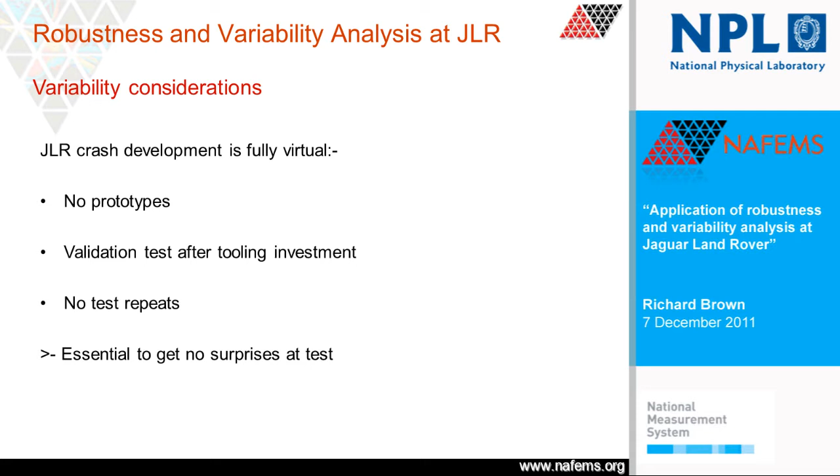These surprises lead to, and we all know these, late design modification, inefficient design. So if I base my design on certain assumptions, if my assumptions are wrong, I will have necessarily an inefficient design. I only do one test, my validation test. So it may be that if I do a second test, it might be a failure. My first test is a pass.

If I get that test done by a legislating body and they find there's a failure, I've got a really big issue, because that might be a recall of vehicles. This could be millions of pounds to the company. So it's all very costly, which is what it's about. It's about cost, as far as we're concerned.

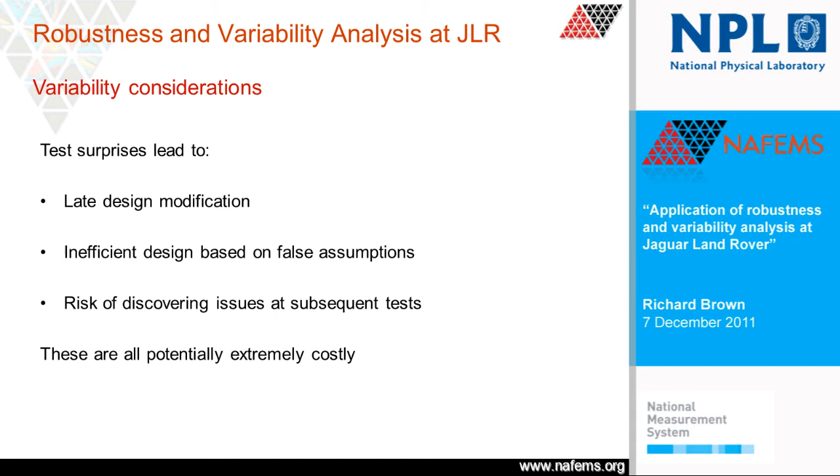Variability leads to these surprises because of all the things that we know. So test-to-test variation. You spoke about initial assumptions being different, being wrong because of the variability. And non-robust numerical models, which is where we're coming from with Clements' talk.

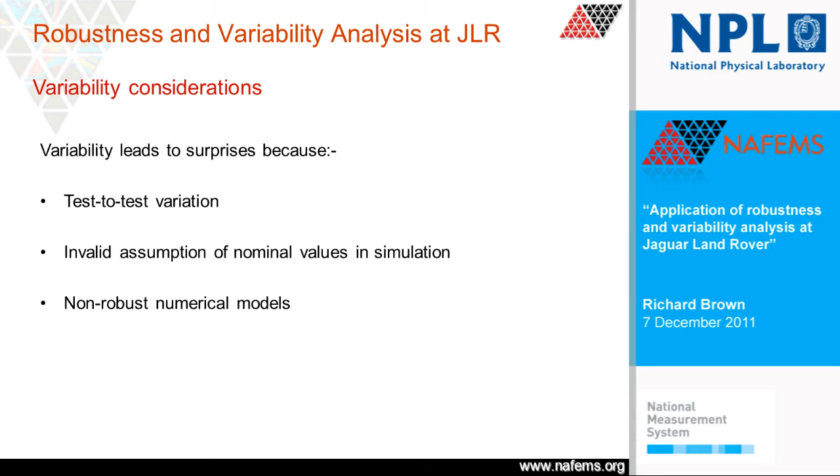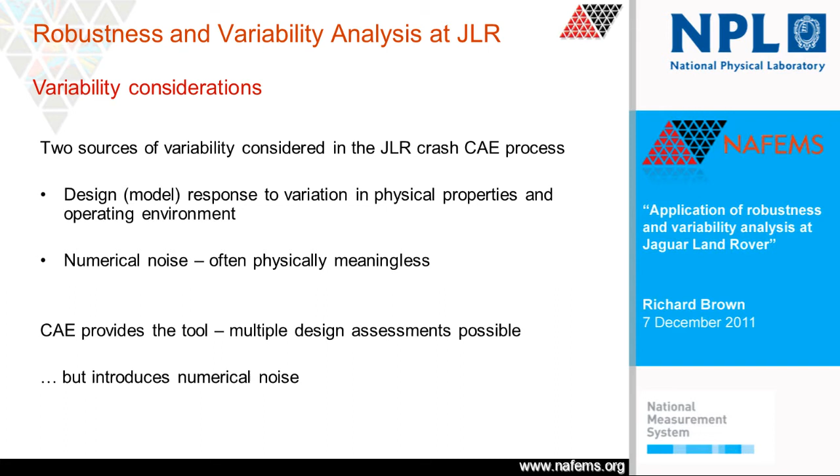So in my world, in Crash CAE, I've got to think about two things. First of all, the response of the design to the physical properties and environment variabilities, represented, of course, in my model. So I've only got my model to talk about the physical world. And also the numerical noise, which often has no physical meaning, it's purely a numerical effect. And the CAE is a very useful tool for all of these, but it brings its own problems.

This comes from, in crash terms, something like 5 million degrees of freedom, 100,000 or 80,000 time steps. There's just so much opportunity there for rounding errors and issues like that to build up. Each of these runs, though, is valid. As I say, I only changed the organisation of what went into the runs. They're all exactly nominally the same input. And the nominal, or the one that I started with, is not necessarily any sort of average here. It's simply one randomly chosen option from that population.

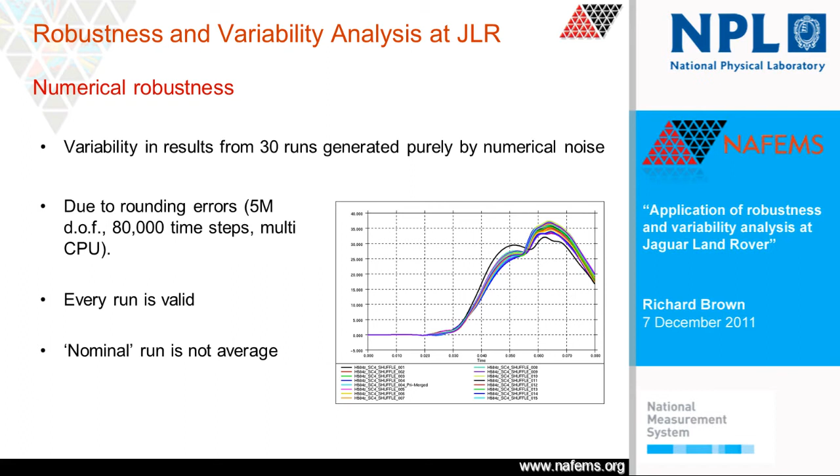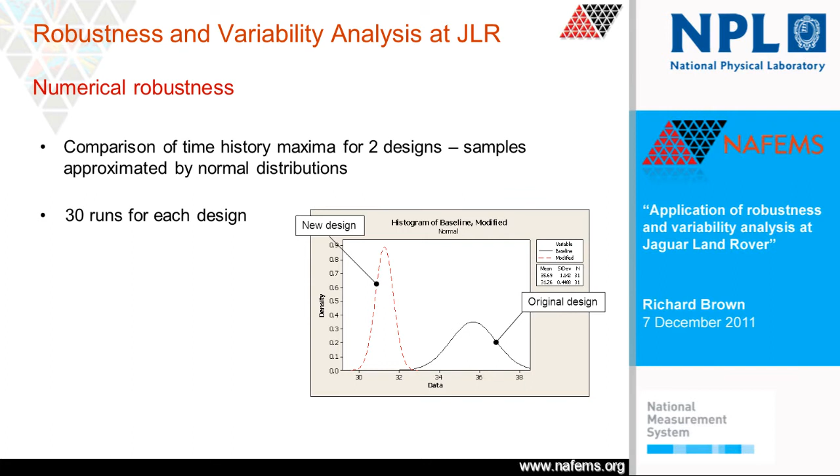We then did a change to the design, and this was the distribution that we got to that design. So the question is, how different are those two designs? 30 runs were done, so it represents 30 runs in each case. If I take the mean of those populations to be a measure of the difference between these two designs, then the difference, the change that I've effected, is 4.6.

The two runs that I originally did, so from the original 30 runs that I showed, I originally just had one run, and I did a back-to-back run with the new design. And that's where they came out. Coincidentally, if you like, arbitrarily, 1 point there, 1 point there. So I originally thought my design change was 3.8 rather than 4.6.

So you could say, well, I've actually done better than I thought I did. But potentially I've over-engineered the design. I've over-engineered it on the basis that my change was 3.8. Actually, I've got a bigger change. I've got 4.6.

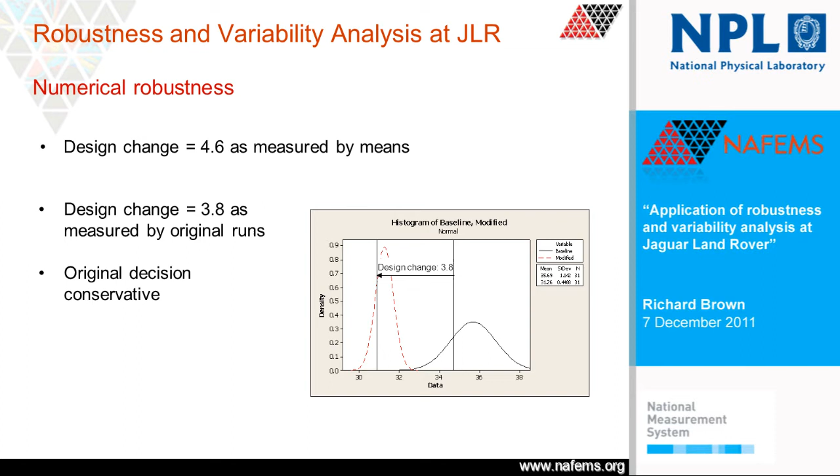If I was to say, well, what could have happened out of a back-to-back? I could quite easily have got a run here relating to this one, and a run here, if I'd chosen any two runs. So I could have quantified the benefits 2.8, or I could have quantified it as 6. So if I happen to get this run and this run in a simple back-to-back comparison, I could have got 6. So I could arbitrarily get anything between 2.8 and 6. I happened to get 3.8. The mean said it was 4.6. So it's chaos really as far as that's concerned.

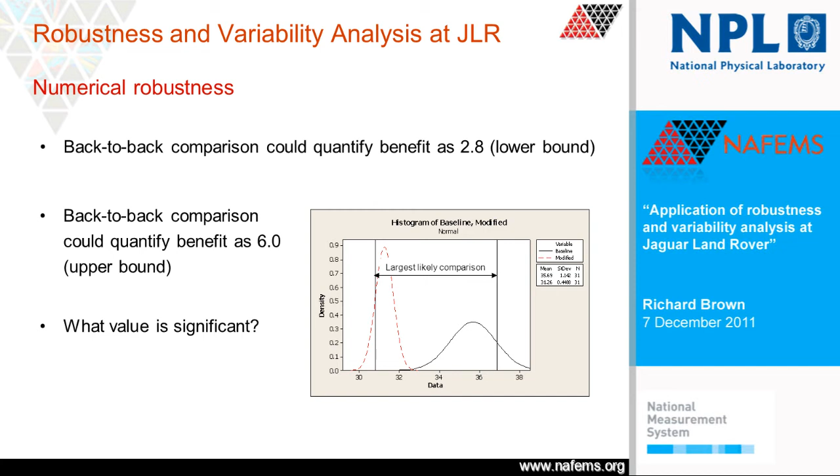So if you look at what is actually significant, there's this idea of model precision. So this original model here, within some limits, has got a model precision of 4.4. If I get a run, then do another run, if the difference between them is greater than 4.4, I can say there's a change in design. If it's less than 4.4, I can't. That's the level of precision of the model.

In this case, clearly I've got a model that's more precise. So I need to get a run that's outside of these limits to be able to call that run different to that population. Clearly in this case, for some reason, the new design is more precise than was the old one. And that perhaps just reflects the fact that the design is a better design.

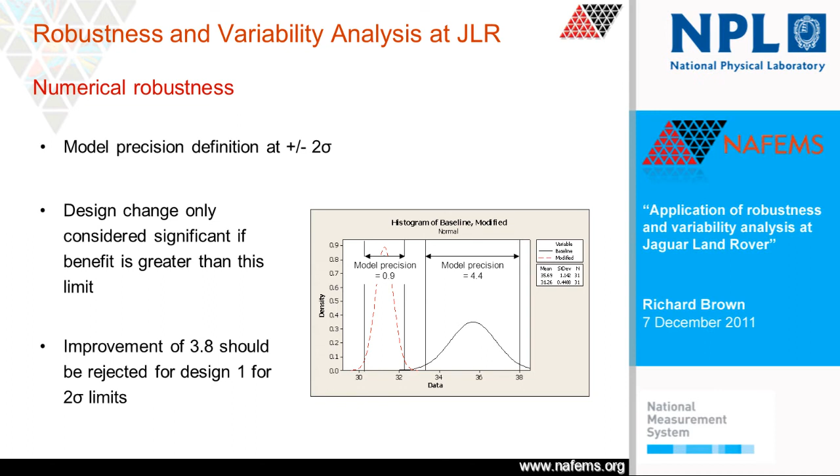So the upshot of that is that a back-to-back comparison is effectively invalid if you don't know anything more about it. The variation can be bigger than design change, and actually often is. We're often making decisions based on an assumed design change that's smaller than the variability I've got numerically. I can't do that sort of robustness study for everything. I haven't got the CPU, so I've got to be able to deal with that. And the way to do that is to understand the precision. Unless I understand the precision, I don't know the significance of any design change.

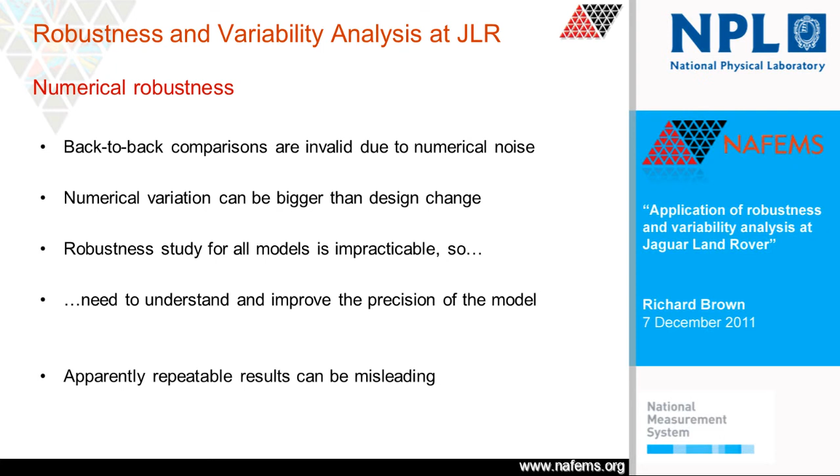And the other thing is apparently repeatable results. So some software programs, particularly in Crash, will say, I'll give you the same result every time I run. Now that is invalid because that's purely putting an artificial constraint on saying I'm always going to do it in the same order. Doesn't mean to say the variability is gone. It's just an artificial way of forcing one result.

So thinking about sources, and this is the link with Clement's work. We've recently started to employ some of the principles that we're talking about there. So where does the numerical noise come from? And it can be very difficult to trace. In the Crash world, we often only see it actually later on. So this is something like 120 milliseconds. It's very late on in the Crash event, and we notice these two differences.

So here's two design conditions. No, I beg your pardon. Two nominally identical runs. So I've done the same again. I've just run the model twice, and got these two differences. This contour represents the degree of variability. So as Clement showed before, what this says is we've got a lot of variability here, a lot here, not much variability here. So this red represents the difference between these two models. So what I'm trying to do is to see, well, where's that coming from in numerical terms?

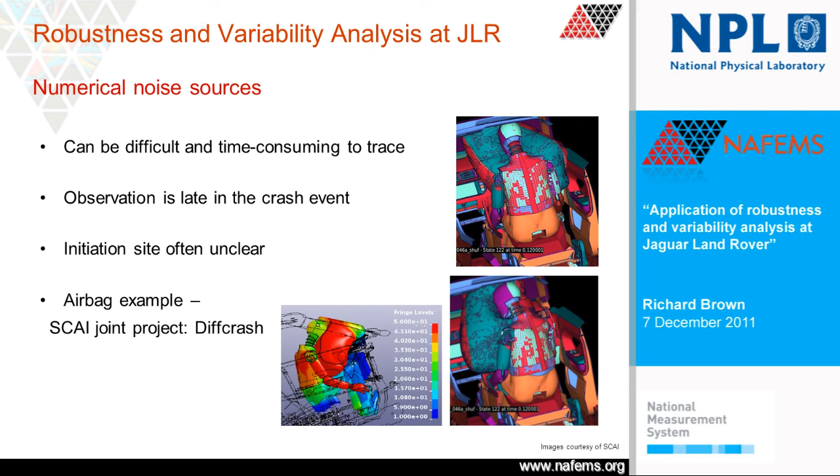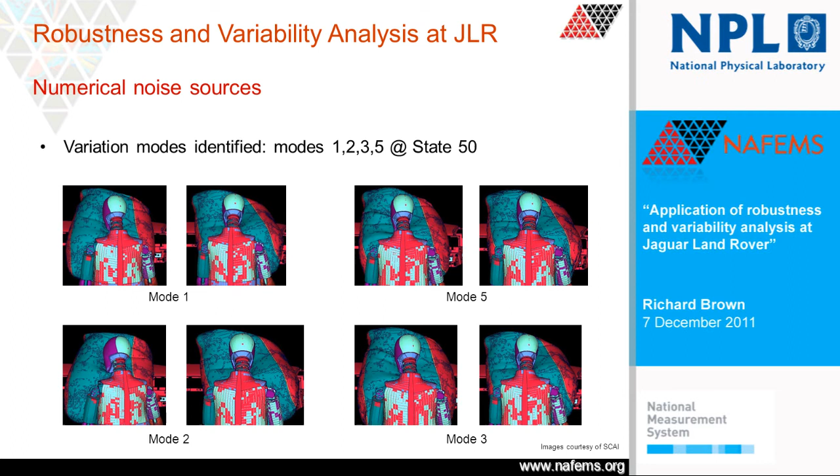And this was a joint project then that we did with SCAI, with Clement, using these principles. Splitting it down into the modes, as he explained, we identified 4 modes which were principally responsible for the variation. And you can see what they look like. So there's a mode doing this difference. There's a mode representing this difference, and this difference. And this again at state 50, which is probably 50 milliseconds or something. So the question is, where does that come from?

If we trace those modes back now to state 13, which is 13 or 15 milliseconds, again they're the same modes. So what is initiating, or what is the earlier effect of each of those modes, is these 1, 2, 3, 5 numbers. So they equate to the same modes. So in other words, mode 1 here ultimately leads to mode 1 afterwards.

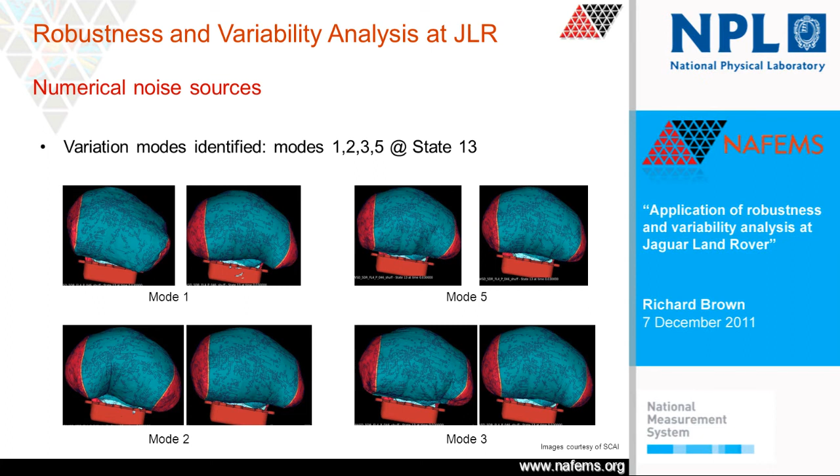And doing a bit more analysis showed that taking the first mode and looking at what is the real difference inside, these are two hoops inside an airbag. So they're hoops that represent bits of tethers, as we call them, inside the airbag. And in one case we had a contact issue here, and in the other case we had no contact issue. And bearing in mind these are nominally identical runs still, this is just a measure of the uncertainty, the numerical noise in the system.

So the solution to this was to make the model more robust, more certain, less variable, by modifying the contact definition there, so that this difference in contact here didn't happen. It was a robust contact definition.

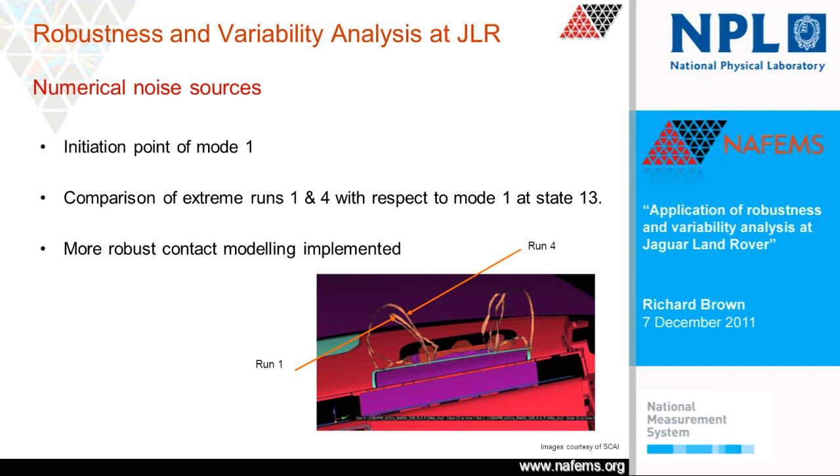So the point is that to improve the precision in this case, we've got to have a stable model, we've got to have models that don't react in that way. We can use this idea of tracking the variability to improve the model. And that can often reduce the variability.

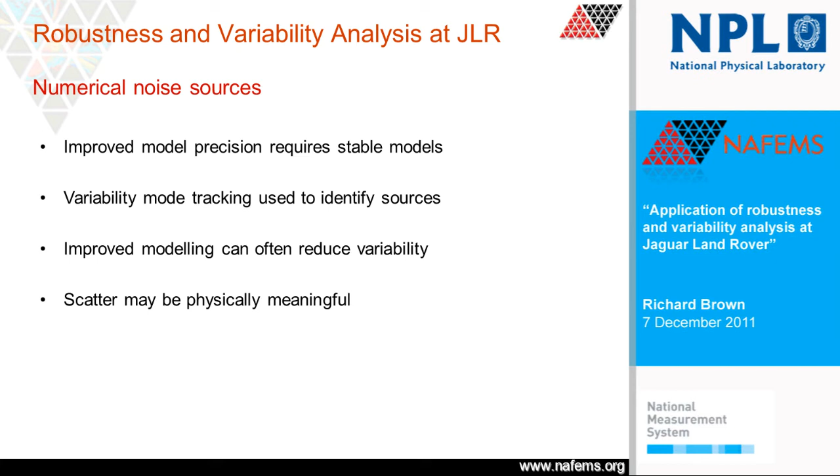And scatter can be physically meaningful. So in this case it's a numerical thing, but sometimes if it is about dropping the ball on the sharp edge and it goes one way or the other, that's a physically meaningful concept that's brought out by this numerical thing. So it can reflect a physically meaningful variability. So an example of physical noise, that's all numerical. This is some results which I have shown in the past, so I don't want to go into great detail.

But in my world of crash simulation, this is a crash dummy, and to certify the crash dummy, we have a test like this where this great big log is flown into the dummy, and the dummy parameters have to fit within certain limits. So this is all in the physical world. The dummy has to fit within this box. This is a speed constraint, and this is a deflection constraint.

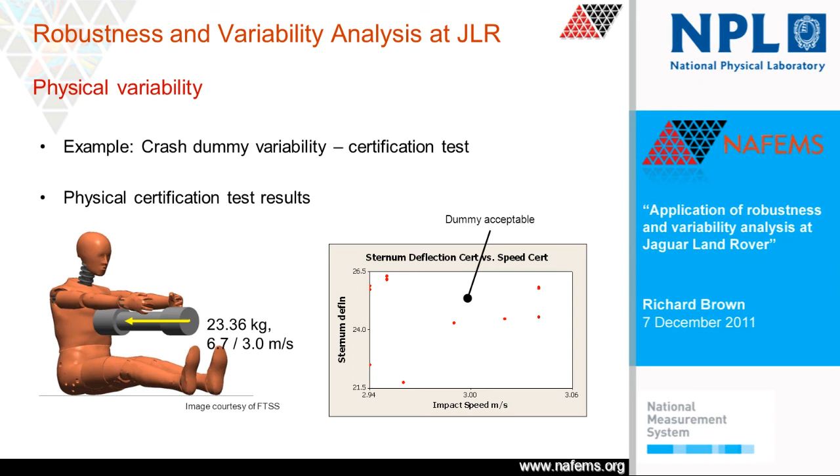Each of these dots represents a dummy, each of those is a valid dummy, again in the physical world. And there's about 15% difference in the dummy stiffness. So to me the question is, what does that mean in my vehicle world? So what we did was to take a CAE model of the dummy and parameterize it. So for each of these components we put in variables that reflected material stiffness parameters.

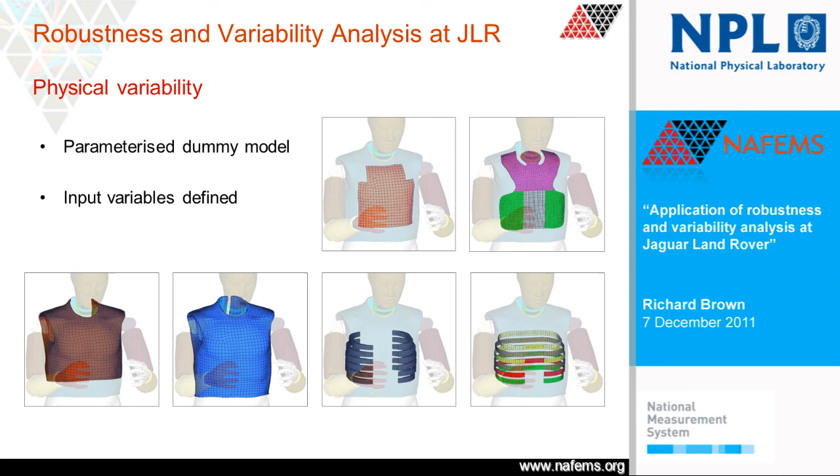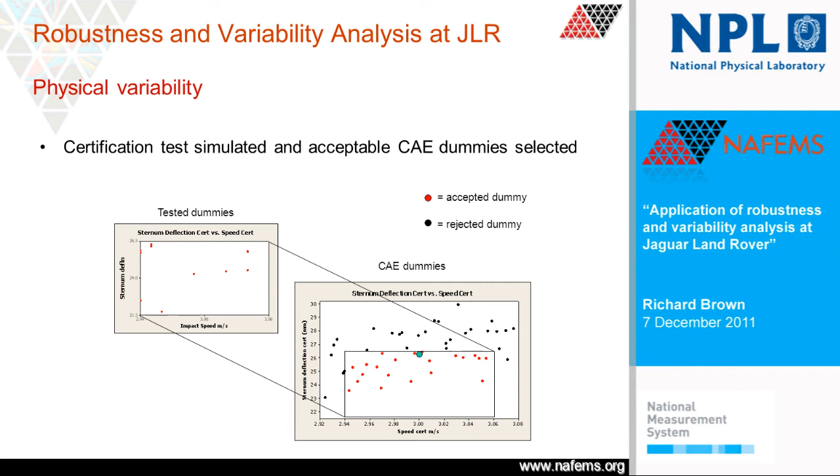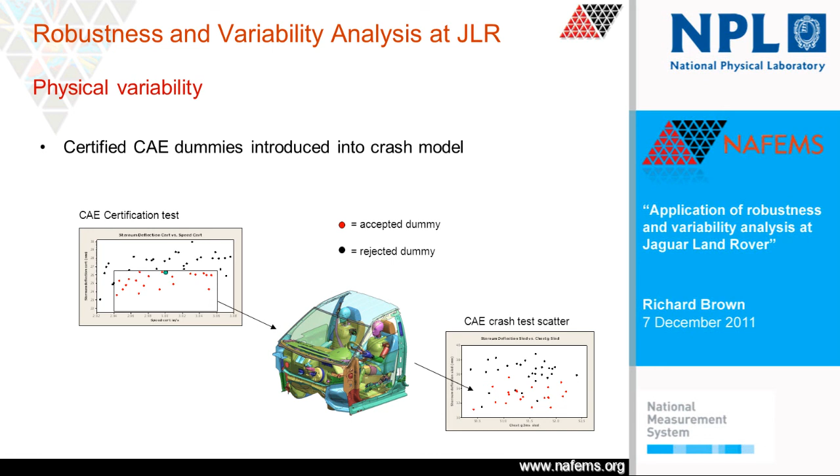Taking that set of valid CAE dummies, we put them through a crash model and obtained some crash results. So again, each of these red dots now corresponds to an acceptable dummy. This gives me real results, or real virtual results, if you like, out of the crash model, and shows me what my range of results are.

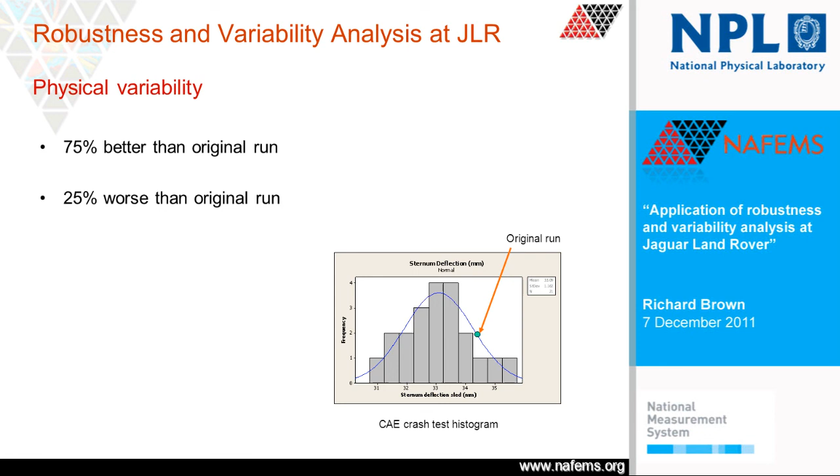So, summary. Variability leads to test surprises and cost. That's what I'm interested in, the cost that's associated with these surprises. It's got to consider physical and numerical, both of those, and it's got to be a consistent process. It's got to be a continuous process as far as our development is concerned, looked at in a structured way. It's got to be baked into the vehicle development program, and not just seen as an added extra.

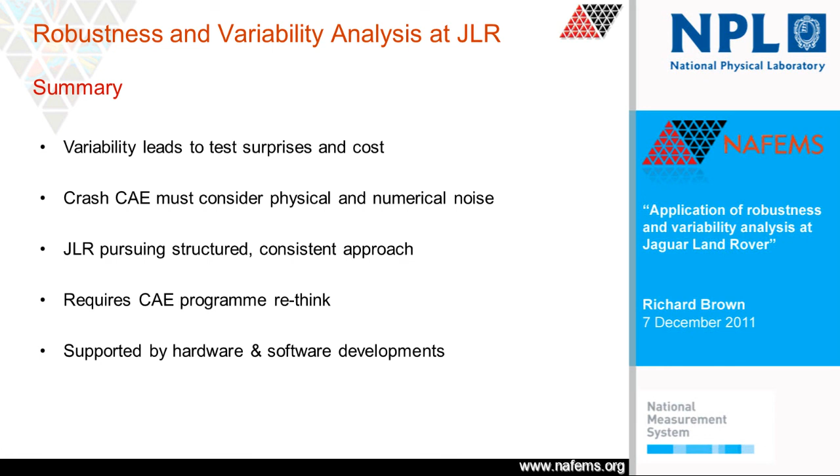And often it's difficult to persuade our development managers that we've got to do this. It's often seen as an extra or a nice to have, and so it always falls off the table. And there are hardware and software developments. As hardware gets quicker, cheaper maybe, and the software progresses, we're starting to be able to support these in a much more structured way. And that's that.